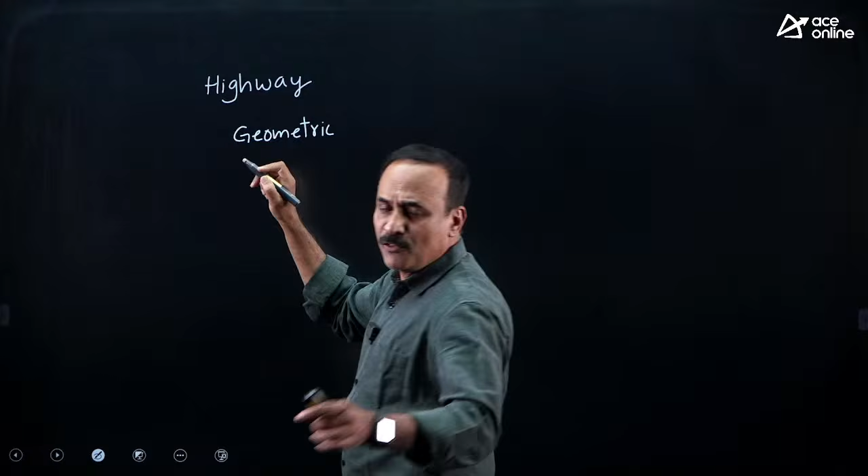You can rely upon this subject, provided you practice on NAT and MSQs properly. Especially in transportation, on highway, complete geometric design is completely formula oriented. If you have good fundamentals of mechanics and good memory, there is a scope of 3 to 4 marks.

Total is 10 marks, only geometric design gives 3 to 4 marks. You can use logic to solve the question sometimes.

Coming to pavement design, we have flexible pavement and rigid pavement design. In this, there is a scope of 1 to 3 marks. Mostly you need to remember a few specifications of IRC codes, IRC 37, IRC 58 also.

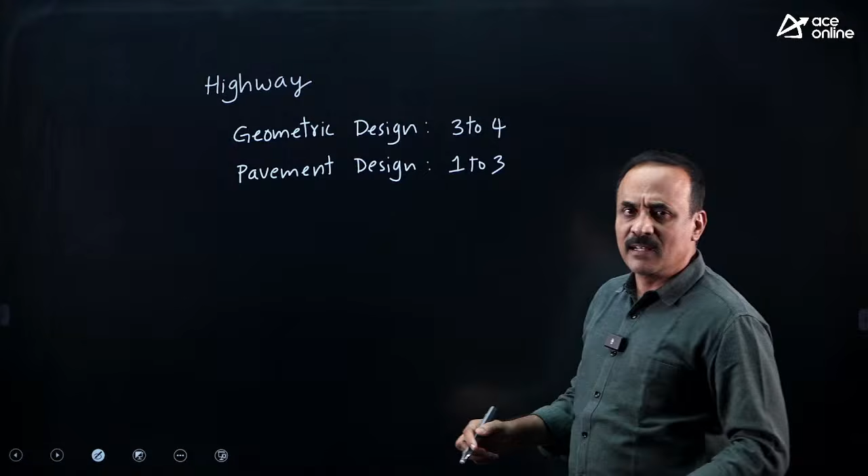Apart from that, you need to go with traffic engineering. If you are not very alert, it creates a traffic jam in the examination hall. This may be around 3 to 5 marks, having slightly higher weightage most of the times.

Coming to highway material testing, 1 or 2 marks. Especially in material testing, be careful about the Marshall mix design method, and concentrate on the aim, apparatus and specifications of each and every experiment of aggregate testing and bitumen testing.

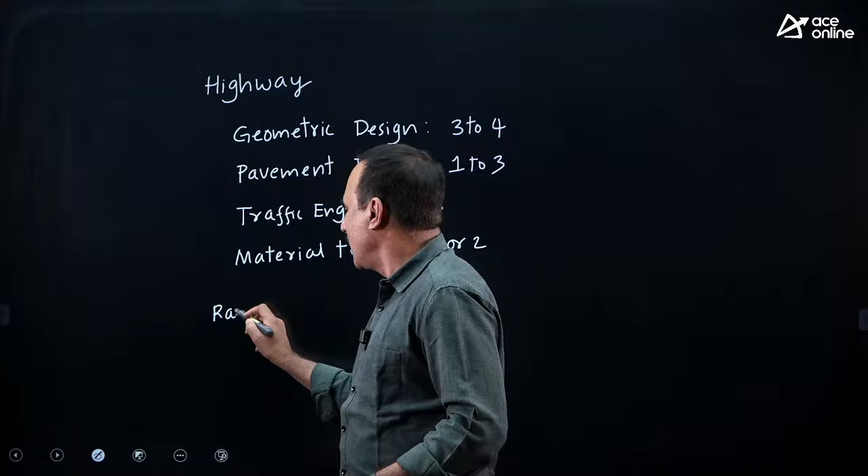Now coming to railway and airport, there is a chance of 2 marks. Getting a question from both railway and airport is rare, but you may get either a question in railway or a question in airport. There may be a chance in 2026 to get a question combining railway plus airport. We only have geometric design for railway and airport.

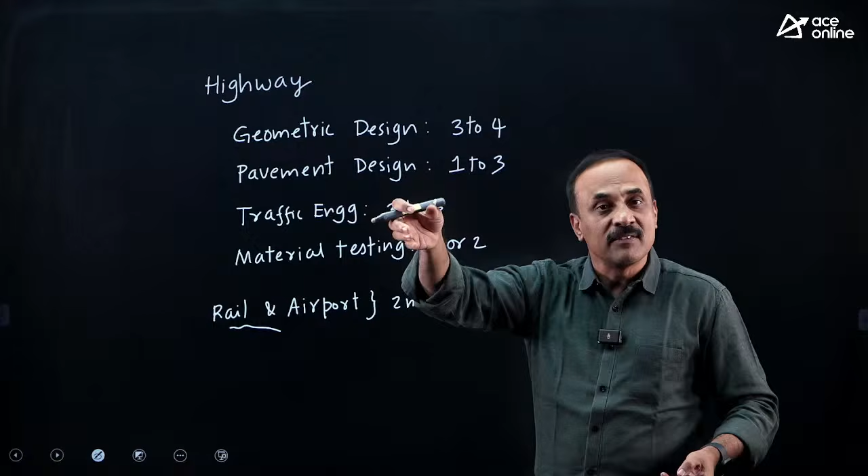Be concentrated on the requirement, especially from the GATE point of view. They'll ask you questions within the bound, meaning they won't go out of the syllabus. So stick to the syllabus, and my suggestion is to go through the previous year questions and similar questions. Questions will not repeat in the GATE exam, but the concept will repeat.

So similar questions will come in the GATE exam. Not only in this subject, in any subject you take, similar questions may repeat. That's why you have to go through the tapped areas where questions are getting repeated, and after you get full confidence, go to the very critical untapped areas. So first focus on questions based upon the previous year GATE papers. Keep this point in mind. And GATE is the Graduate Aptitude Test.

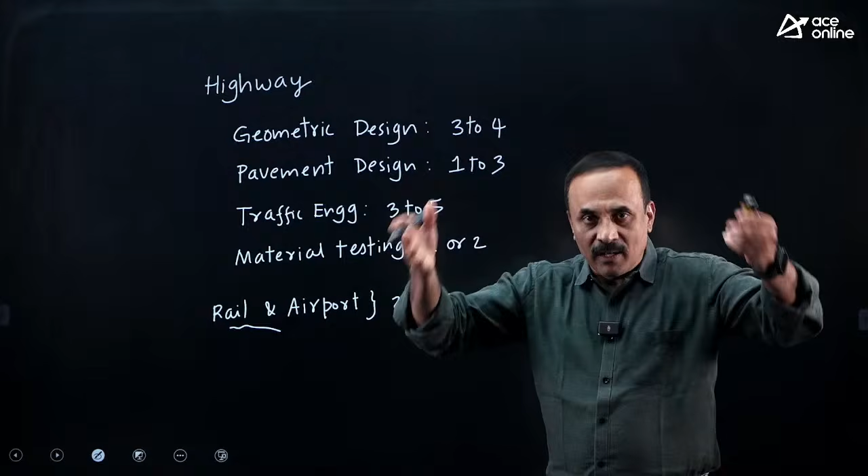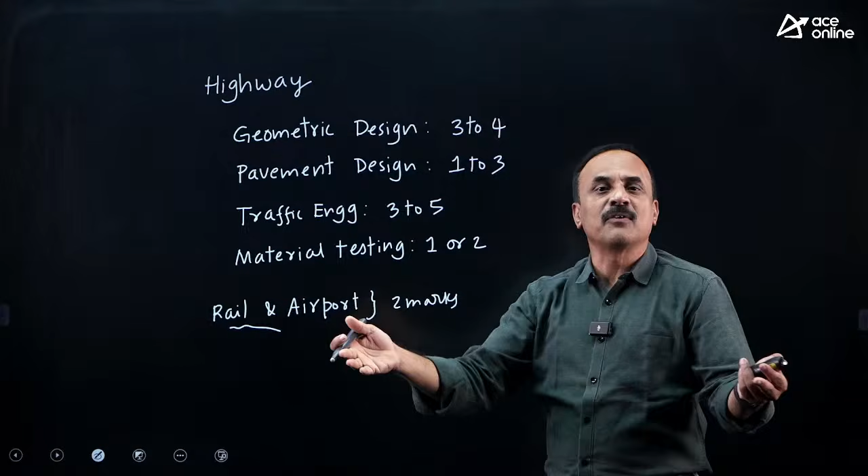Few questions may come on the aptitude, meaning with engineering aptitude thinking you can solve a few questions. If time permits, try to solve such slightly critical level questions with aptitude. Now we will start taking a few questions of transportation, mixing all the topics together randomly, so that even in the paper you get questions in a random manner. We will start with transportation questions, mainly numerical answer type and multiple select questions.

See this question. It is directly a multiple choice question, so one multiple choice will start and go ahead. Read the question: CBR test load corresponding to 2.5 and 5 mm penetrations are given as 80 and 100 kg. They are asking you the CBR of soil in percentage. This is a memory oriented question where you need to remember the standard loading. CBR at 2.5 mm settlement is load at 2.5 divided by standard load at 2.5, into 100. Load at 2.5 penetration is 80. Standard load at 2.5 mm you need to remember, it is 1370 kg, into 100.

So this may be 5.8%. And the same way, CBR of 5 you calculate: load at 5 mm settlement is 100 kg, divided by standard load 2055 kg, into 100. If you simplify with your online calculator, it is 4.8%. Use an online calculator, don't unnecessarily try to do it on your own and commit mistakes. If facility is given, use that. If you are writing exams like ESE prelims and other local exams, SSC JE exam, there is no other option, you need to simplify on your own. If facility is given, then use that facility, use online calculator in the simplification.

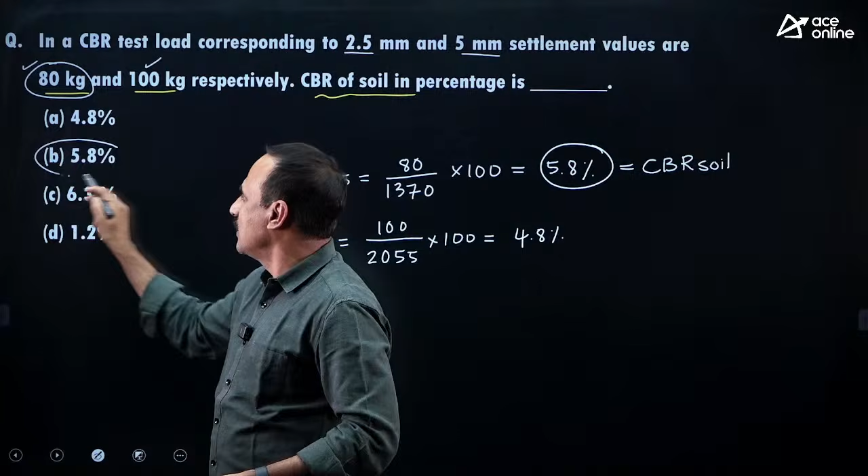So this is a multiple choice question. The problem with the multiple choice question is there is negative marking of 1/3 for a 1 mark question, and 2/3 for a 2 marks question. Now,

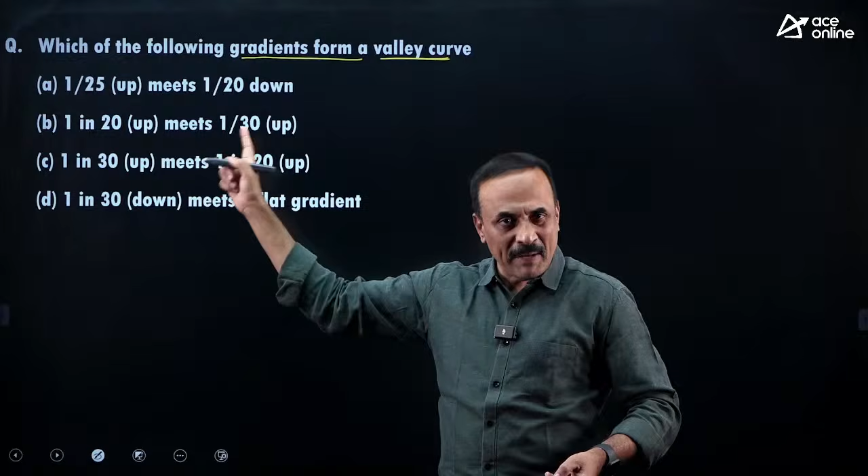See this question, it is from geometric design of vertical curves. Which of the following forms a valley curve? Valley is a sag curve. Remember, for a sag curve the deflection angle is negative, and for a summit curve the deflection angle is positive. Deflection angle is the algebraic difference of the gradients, nothing but first gradient along with its own sign, minus second gradient along with its own sign. Generally upward we take as positive, downward we take as negative. Give me which of the following are the valley curves. It is a multiple select question having more than one correct answer. Let us see how many of you are giving me the right option.

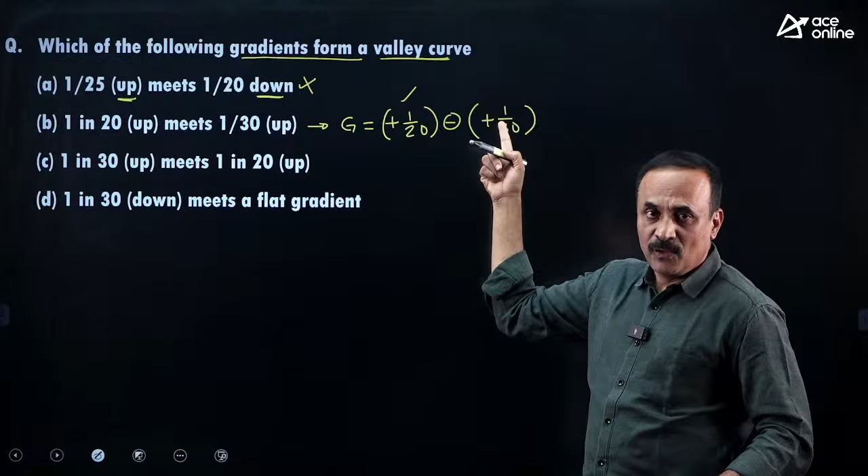Coming to the next one, 1 in 20 and 1 in 20 upwards, and 1 in 30 also upwards. So the deflection angle here is plus 1 by 20 minus of plus 1 by 30. 1 by 20 is higher, since you're dividing by 20, its value is higher compared to the value divided by 30. Higher value minus less value will be a positive value. Positive value means it is a summit curve, it is not a valley curve. No need of complete calculations, you can just check it up like this also.

Now, Murali, Nova, please check up. B is not in your list. B should not be in your list.

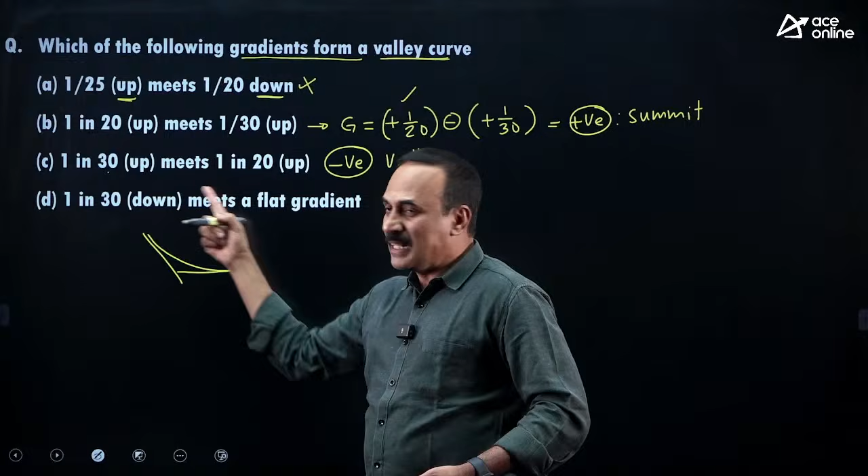So the answers are C and D, it is not A and B. D is also a valley curve where the deflection angle comes out to be negative, as Hari Krishna noted. Okay, is it okay?

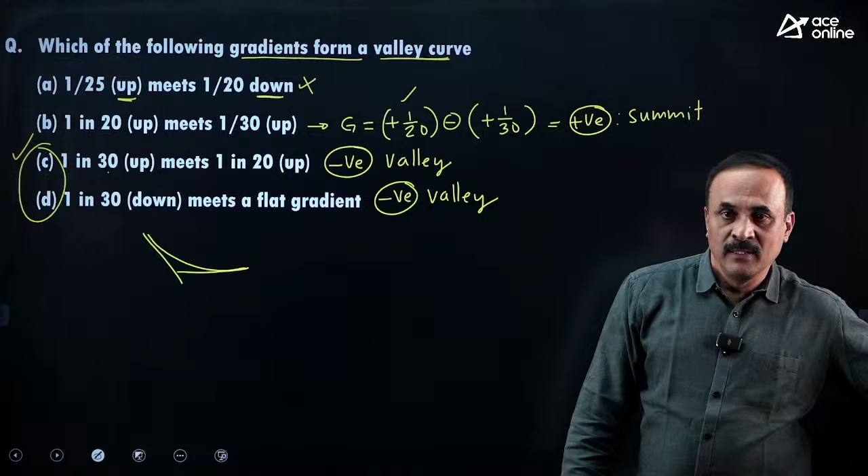Yes, we will move to the next. Look at this question. This is related to Marshall specimen of bituminous concrete mix, tested in a lab, giving the following results.

Maximum specific gravity of the mix is nothing but theoretical specific gravity of the mix. Maximum we get if there is no air, so this is theoretical specific gravity without air. Bulk specific gravity is a measured specific gravity, including air.

Percentage weight of bitumen is given as 5.5% by weight. Specific gravity of bitumen is also given as 1.02. Assuming no absorption of bitumen, the voids in mineral aggregate and VFB values are being asked.

It is also a multiple select question, there may be more than one correct answer. VMA is 46.9 here, and VMA is 19.45 here, so any one of options A and C may be correct. Similarly for VFB, any one of options B and D should be correct. For that we need to calculate.

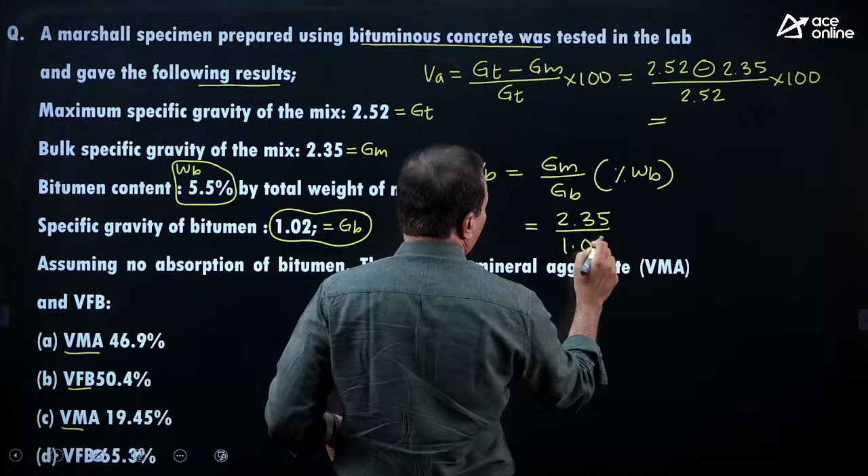Next, volume of bitumen is GM by G of bitumen into percentage weight of bitumen. GM is given as 2.35, specific gravity of bitumen is given as 1.02, percentage weight of bitumen is 5.5%. Calculate this, and voids in mineral aggregate from percentage air content and percentage bitumen content.

Calculate, and voids filled with bitumen is volume of bitumen divided by total voids in mineral aggregate into 100. Give me the answer. Let us see which options are correct.

There is a scope of committing mistakes in the calculations, be careful. Air content is 6.75%. Next, bitumen content is 12.7%.

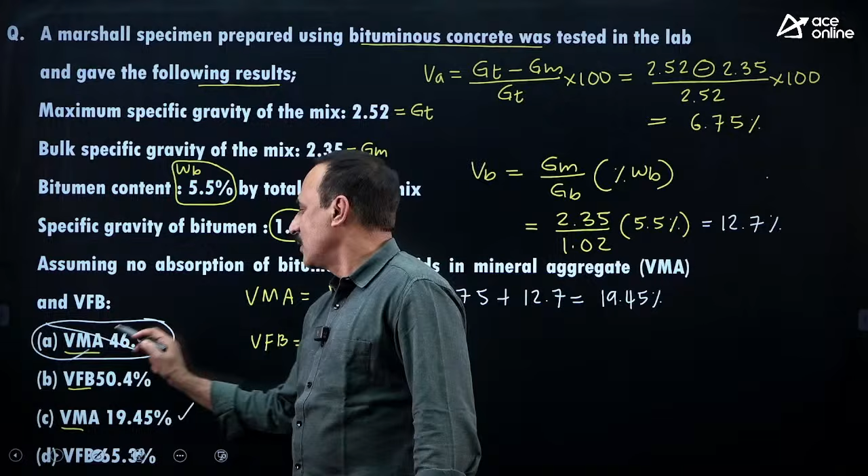A is gone. Voids filled with bitumen: bitumen content is 12.7, total voids are 19.45, into 100. How much percentage of bitumen is there in the voids? 65.3. So here 50.4 is gone, the answer is 65.3.

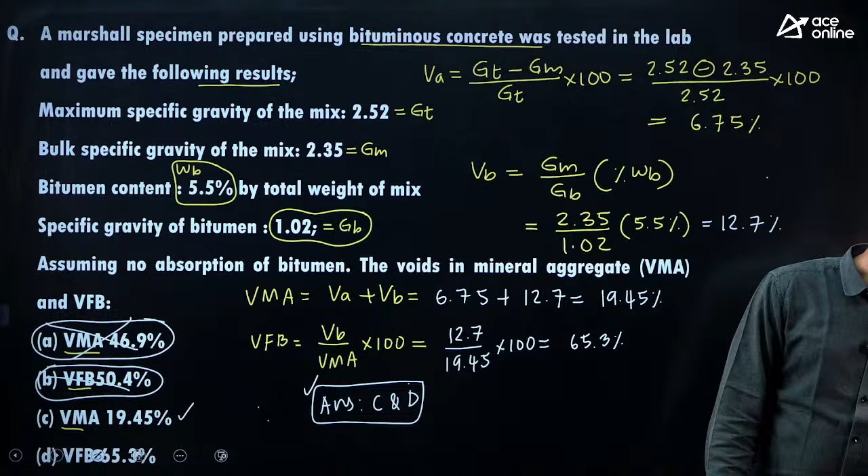Answers are C and D. Be careful about such multiple select questions where more than one answer is there. Rocky, Satish, Murali, Hari Krishna, and Nova all gave correct answers. Perfect, we'll move to the next question.

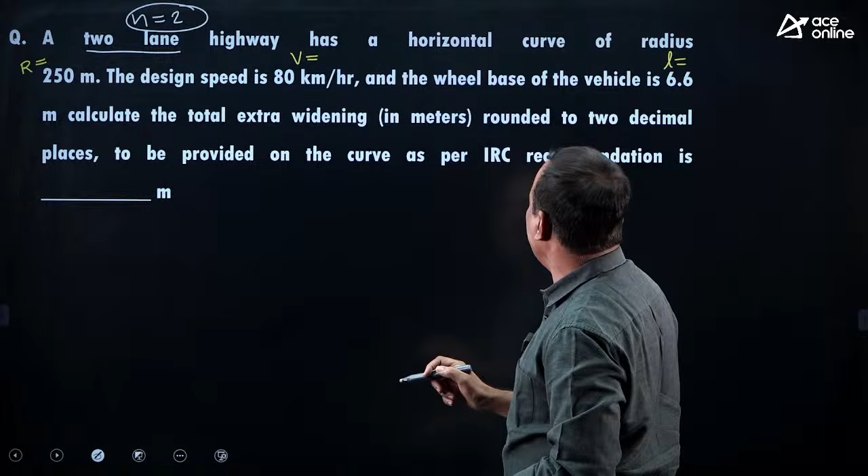A two-lane highway has a horizontal curve of radius 250 meters, n equals 2. Design speed is 80 kmph, wheelbase of the vehicle is 6.6 meters. Calculate the total extra widening in meters, rounded to 2 decimal places, provided on the curve as per IRC recommendation.

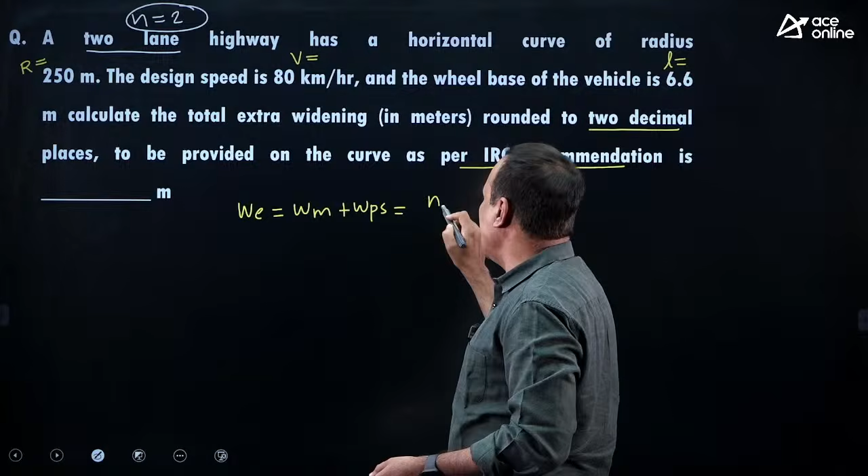This is a numerical answer question, be careful. Extra widening comprises mechanical plus psychological widening. Mechanical widening is NL square by 2R, and psychological widening is V by 9.5 root R, for a two-lane road.

For each lane, divide by 2; if you have more lanes, multiply by n. For a 3-lane road it's 3 by 2 of this, for 2-lane road it's V by 9.5 root R, for 4-lane road it's 4 by 2 into this. For a single lane road, psychological widening is not required per IRC, you only need mechanical widening. This point must be added now in solving the problems.

N by 2 is to be added now, we will solve by substitution of values. N is 2, length of rigid wheelbase 6.6 whole square by 2 into radius 250. Be careful here, this n by 2 is required in the present situation. In olden days people were using psychological widening as V by 9.5 root R regardless of number of lanes, but now n by 2 into this is a must because it's for two-lane roads.

For multi-lane roads, this is to be distributed accordingly, as given in IRC. So 2 by 2, design speed is given as 80 kmph, 9.5 root over 250 meters. Simplify this and give me the answer. I will check up the answer.

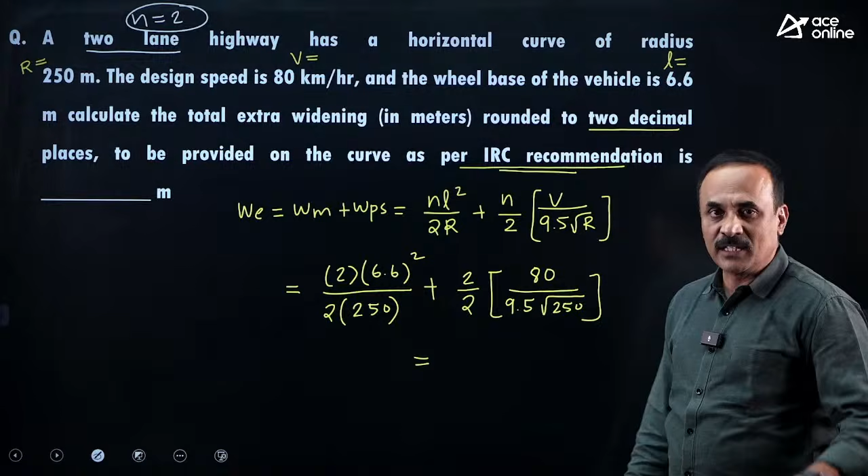In case n by 2 is not mentioned, you get wrong answer. If you are not using this, luckily for 2-lane road it may be okay, but if it is 4-lane or 6-lane road, you may miss the answer. If you look at old previous year GATE questions, some 10 years back, even for 4-lane roads, only V by 9.5 root R was used, and there was no such discrepancy then. But in the present IRC, modified IRC, they have clearly mentioned that V by 9.5 root R is for 2-lane roads. For any other multi-lane roads, this is to be distributed according to the number of lanes, that means n by 2 into V by 9.5 root R. For single lane roads, there is no need of psychological widening.

So what is the answer, Murali? If you take this rounded to 2 decimal places, it is 0.71 meter.

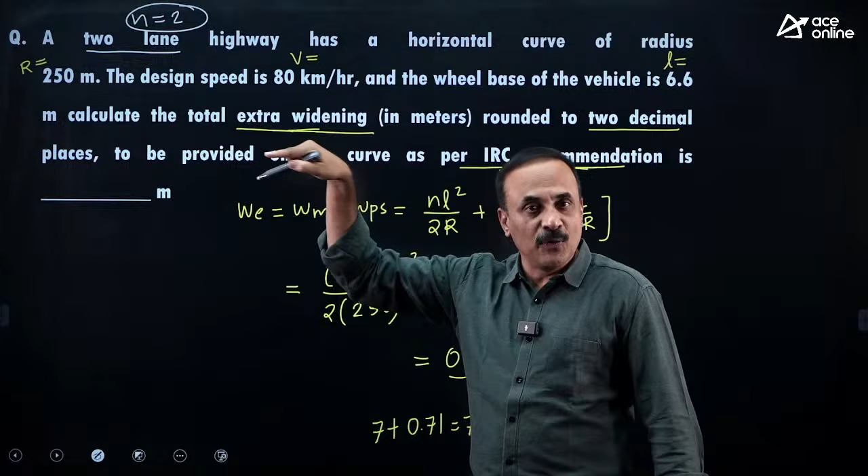Be careful, they are asking you extra widening only. Sometimes they will ask you what is the total width of the road. If they are asking total width of the road, 2-lane road width is 7 meter, for each lane 3.5 meter, so 2 lanes is 7 meter plus 0.71, so it may be 7.71 meter total width of the road on curve. But presently they are asking extra widening. That is why I keep telling you, read the question carefully. If you are not reading the question carefully, you may miss the answer. Sometimes they will ask extra widening, sometimes total width of the road on curve along with extra widening.

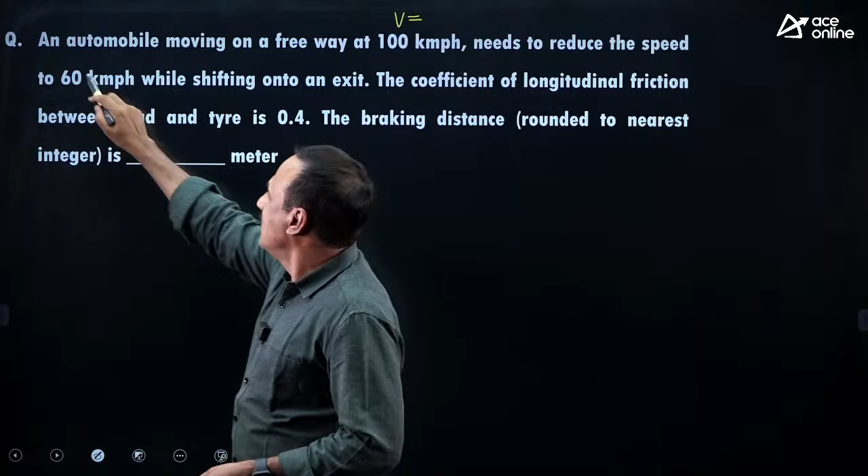Next question. An automobile moving on a freeway at 100 kmph needs to reduce speed to 60 kmph while shifting into an exit. The coefficient of longitudinal friction between the road and tire is 0.4. Braking distance they are asking you. Braking distance is given by initial speed square minus final speed square, divided by 254 into longitudinal friction. Substitute and give me the answer. It is a straightaway formula-oriented numerical answer question.

Murali, that previous question answer 0.706, if you round it to 2 decimal places, becomes 0.71 meter. Rounding off as per the requirement is compulsory in the GATE exam.

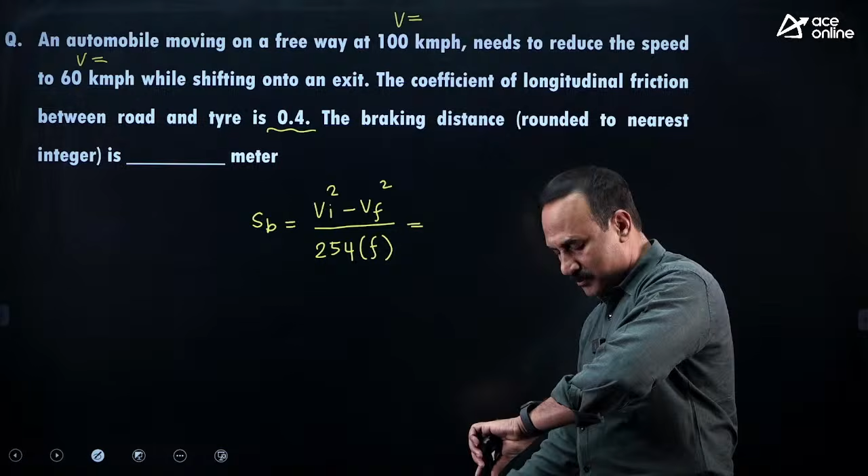So here, 100 square minus 60 square by 254 into 0.4, rounded to the nearest integer. So it is 62.9 meter you are getting. If you round it to an integer, you need to round it to 63 meter. Be careful, it is to be rounded to 63 meter. Is it 63 or 67? Please check up. Yes, 63 meter, 62.99 rounds to 63. Murali, you are correct.

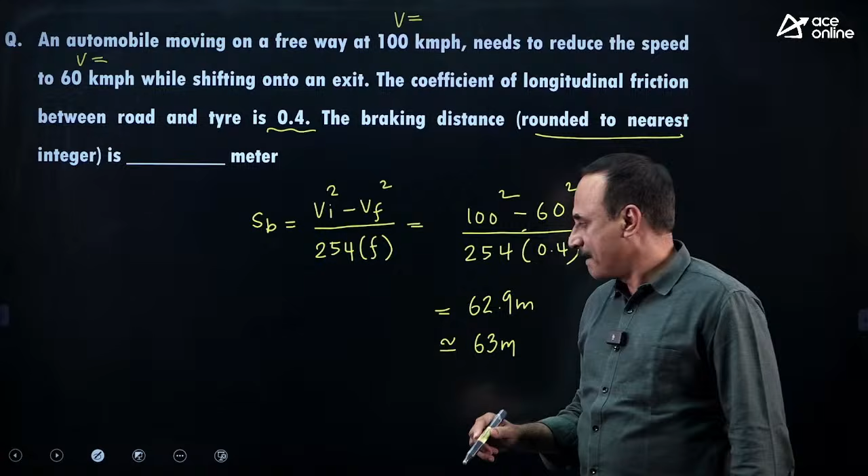But Sharath is giving 67. Be careful, if you are not concentratedly calculating the things, you may miss the answer. We will move to the next question please.

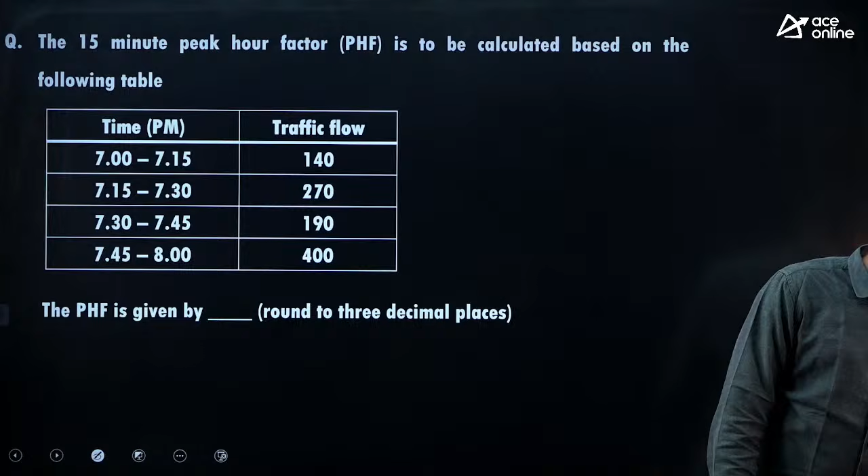Next question. The 15-minute peak hour factor is to be calculated based on the following table. The peak hour is 7 to 8, taken in 15-minute time slots. Among the 4 time slots, the highest is 400. The total is 140, 270, 190, 400.

So peak hour factor is equal to total traffic flow during 1 hour divided by 4 into the higher of the 4, 15-minute slot values. Give me the answer please, try to give me the right option.

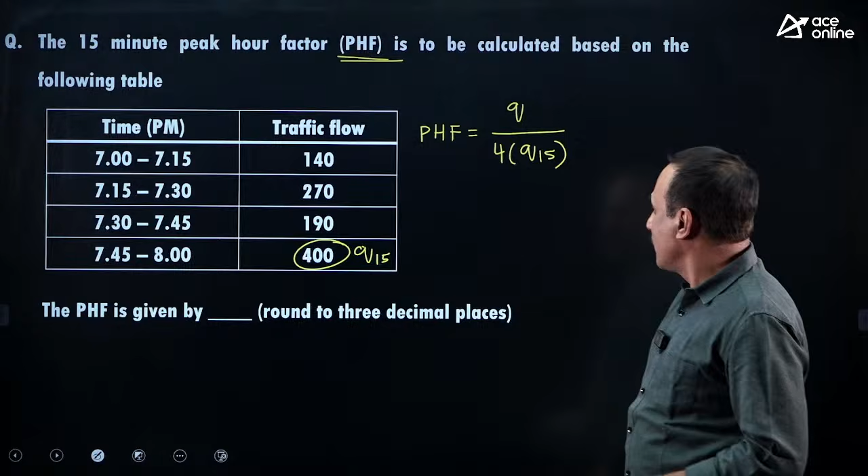The sum is 140 plus 270 plus 190 plus 400. Highest of the 4 slots is 400 again. So this ratio is 0.625. Round to 3 decimal places they are asking, so 0.625 is the right option.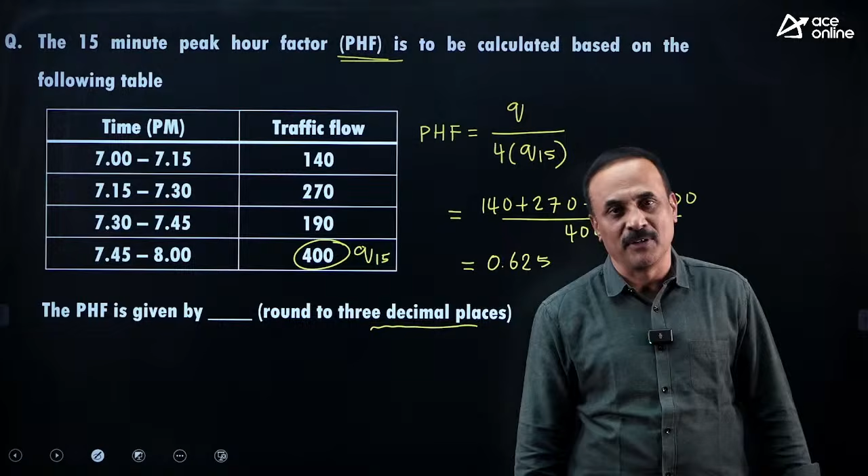Let us see how many have given the answer correctly. Sharath, you are committing a lot of mistakes. He has given 0.165, that is a mistake. Even though you know the concept, the procedure, and have by-hearted the formula, committing a mistake in the calculation is a suicidal attempt. Be careful Sharath, you have to be very careful. Speed is not important, safe speed is important. Other people have correctly given 0.625. Satish given correctly, Nova correct.

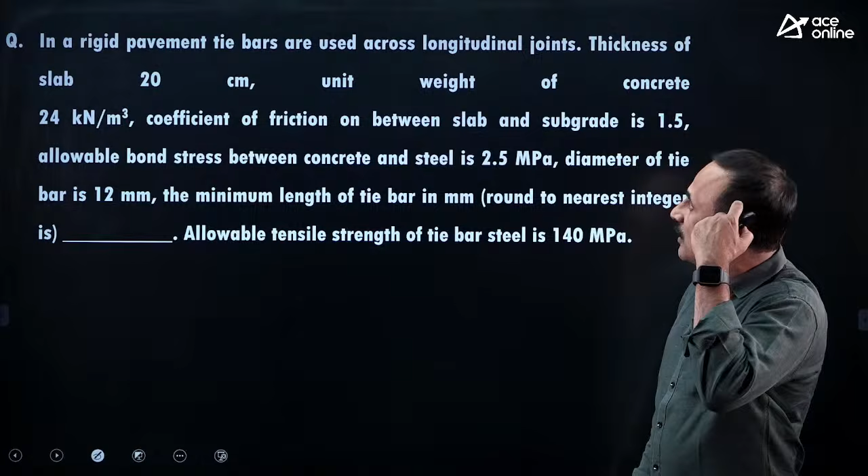3 decimal places, we will move to the next. In a rigid pavement, tie bars are used across longitudinal joint. Thickness of slab is 20 centimeter. Unit weight of concrete, gamma of concrete, is 24 kilonewton per meter cube. Coefficient of friction between the slab and soil is 1.5.

Allowable bond stress, design bond stress, directly you can take it: Tau BD is 2.5 megapascal. Diameter of tie bar used, phi, is 12 mm. The minimum length of tie bar, rounded to the nearest integer, they are asking - numerical answer question. Allowable tensile strength of the steel, sigma st, is given as 140.

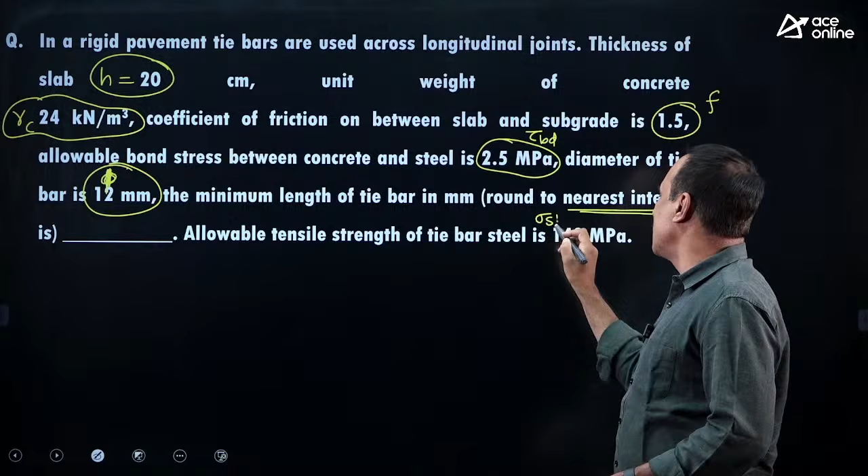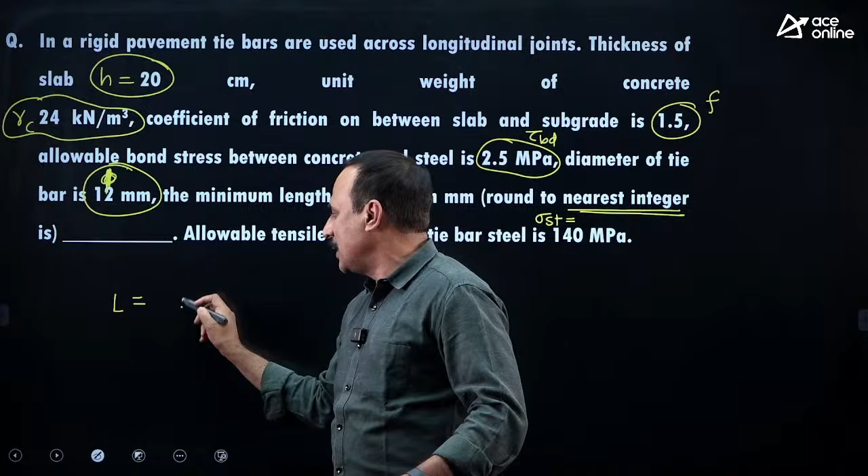So length of tie bar is taken such that the tie bar should be embedded on both sides of the pavement, left side as well as right side. On the left part it should have a minimum embedment of development length, on the right part also a minimum embedment of development length is required. So total length of tie bar is 2 into development length.

The development length is given by phi into sigma st by 4 tau BD. Tau BD is design bond strength, phi is diameter of steel bar, taken as 12 mm. Take everything in mm and Newton units only. Sigma st is 140 megapascal, nothing but Newton per mm square. Tau BD is also in megapascal, 2.5 Newton per mm square.

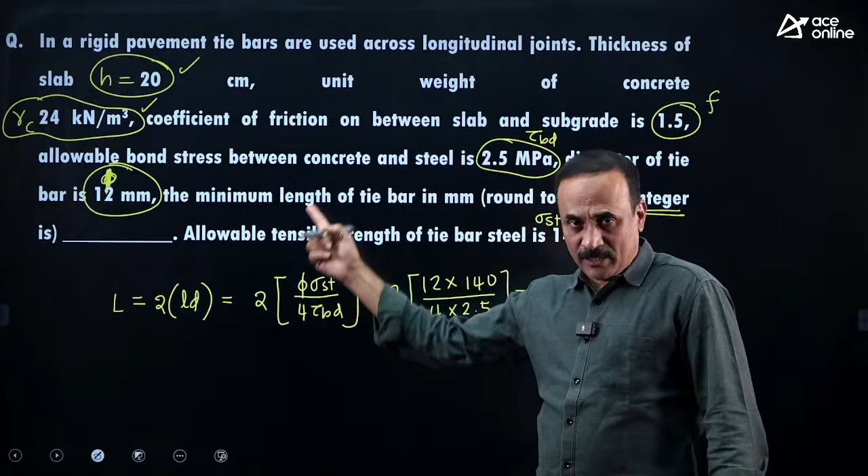In this question, thickness of the pavement is extra data, not useful. Density of the pavement is also extra data, not useful. Sometimes they give extra data to confuse people, so be careful about such extra data. Without feeling tension, without facing pressure, you need to eliminate that extra data, simplify, and give me the answer.

Let us see what answer is given here. Murali has given 336 mm. Let us see one more answer. Murali goes with 336 mm. They are asking you to round it to the nearest integer. Okay perfect, 360 mm... 336 mm is the right option.

Shall we move to the next question? Only Murali has given the correct option. Nobody else has given it. Okay yes, Satish also given correct. Okay, we will go to the next question.

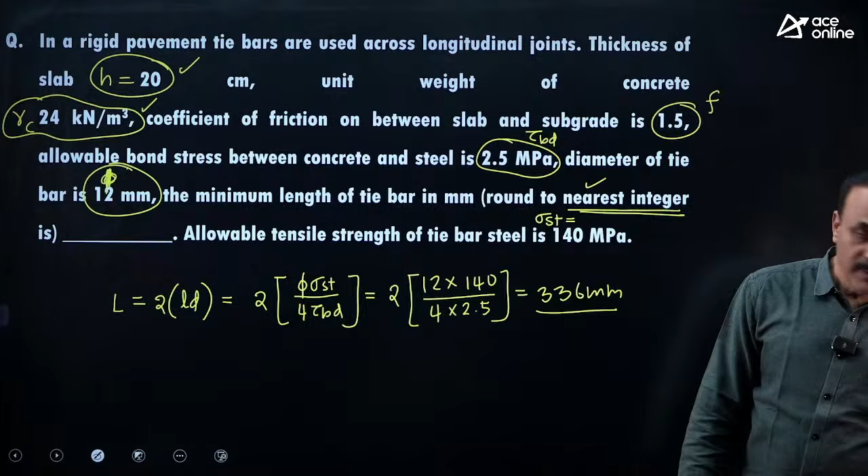Which of the following statements are true with respect to geometric design of highways? It is also a multiple select question. Based upon geometric design of - not railways - highways they are asking. Read the question properly, first read on what basis they are creating the question: they are creating it on geometric design of highway.

The coefficient of longitudinal friction is... very sorry, coefficient of longitudinal friction is 0.35 to 0.4. Lateral friction is 0.15. So statement A is false. But in a multiple select question, you need to read all the options and identify which is correct and which is false. Next, option B: maximum super elevation on hilly road as per IRC is 10%, right?

Plain terrain, rolling terrain: snowbound hilly terrain it is 7%, and normal hilly terrain it is 10%, correct. The rate of change of centrifugal acceleration on a horizontal transition curve is 0.5 meter per second cube for a design speed of 100 kmph - that you need to check up. So capital C is 80 by 75 plus V.

V is 100 kmph, so 80 by 75 plus 100. What should be the value? You get it as 0.46, but capital C should be between 0.5 to 0.8 meter per second cube. So as the value is less than 0.5, you need to use C is equal to 0.5 meter per second cube. So the answer is option C is true.

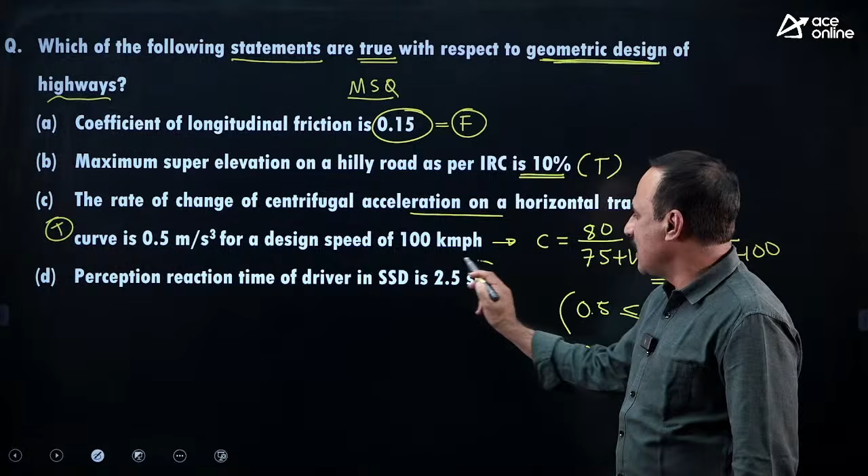Perception reaction time of driver in SSD is 2.5 seconds, this is also true. Please read the question carefully. In SSD, reaction time is 2.5. In OSD, if they are asking you, it is 2 seconds. So the right options are, except A, all are right: B, C, D.

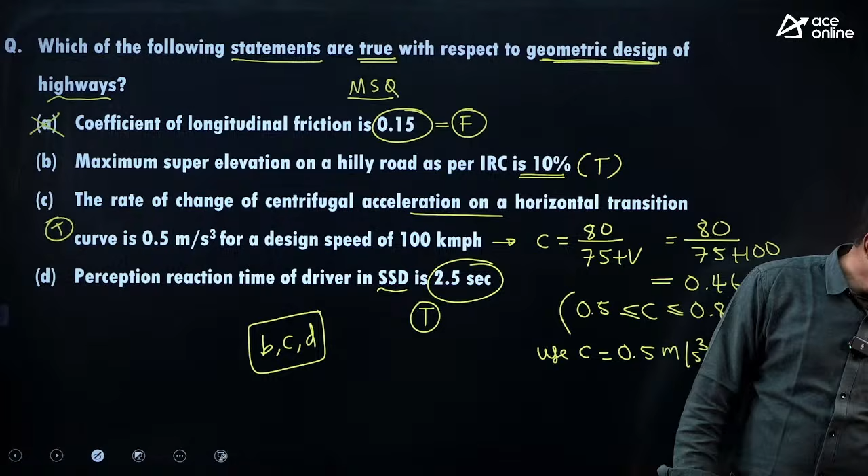Any doubts? Already most of the people have given this as the answer. Hari Krishna gave correct, Murali also gave correct. All specifications you need to remember, Murali.

Specifications are important for GATE exam. I told you so many times, specifications plus formulae are very important. And in case of empirical formulae like this, the unit of speed is also important for us. The speed is capital V in kmph. C is rate of centrifugal acceleration in meter per second cube. Be careful, units, specifications, formula you need to write.

Come to the next question. The speed and density curve is given below. What may be the flow and density relation? This is given to us. Which option is correct for that?

Any option please? Actually, Q is equal to kV. Up to here, speed is constant. Speed is constant, only density is increasing. Density linearly increasing, speed constant. Q should also linearly increase. So from here to here,

Q should also linearly increase. With that, only one option works. Q should also... V constant, K increasing. With that one option, you can pick up the answer as option A directly. Because it is starting with some V, say V is 20, everywhere it is 20 only. V is not changing. With K it is changing.

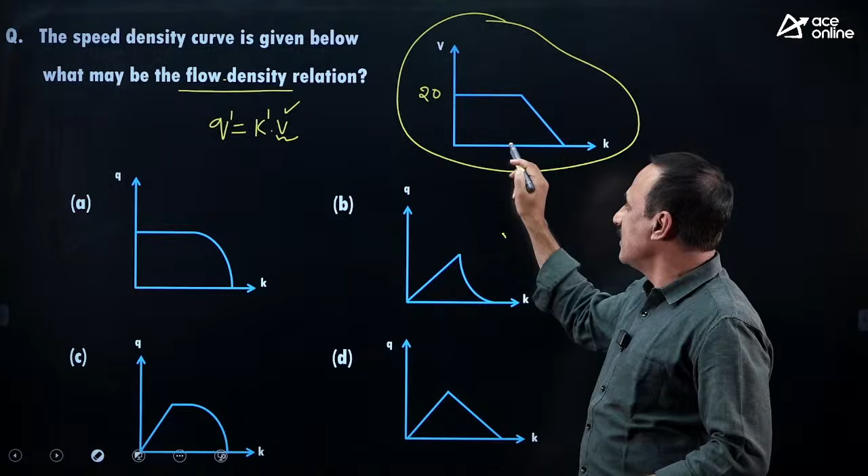Say for example, K is 0 - I think this is wrong, very sorry, be careful. So if the k values are increasing here, q should also increase. If k is 0, q should also be 0. If k is increasing, q is increasing, sorry, k is increasing, q should also increase in the same manner. So the answer should be linear in the first zone, it should be linear.

This is the first option to be eliminated. If k is increasing: k 0, q also 0; k 0, q also 0; k is 1, q also 1; k 2, q also 2, like that it increases from 0. K 30, q 30, 30 into v, v is a constant.

Now come to here, there is a sudden drop of speed, a decrease of speed. So if you observe, speed suddenly decreases, meaning q should also decrease in the same manner. But if you observe here, there is a drastic reduction of q, but here the reduction is not that drastic, it is gradual. So this is ruled out, and here it is linearly decreasing. Linearly decreasing is not possible because here speed is changing, k also changing. The main point is, as there is gradual reduction of values, this is the right option. So the answer is option C.

Logically, you need to pick up the answers. Logically, you need to pick up the answers. Okay, any doubts here, please?

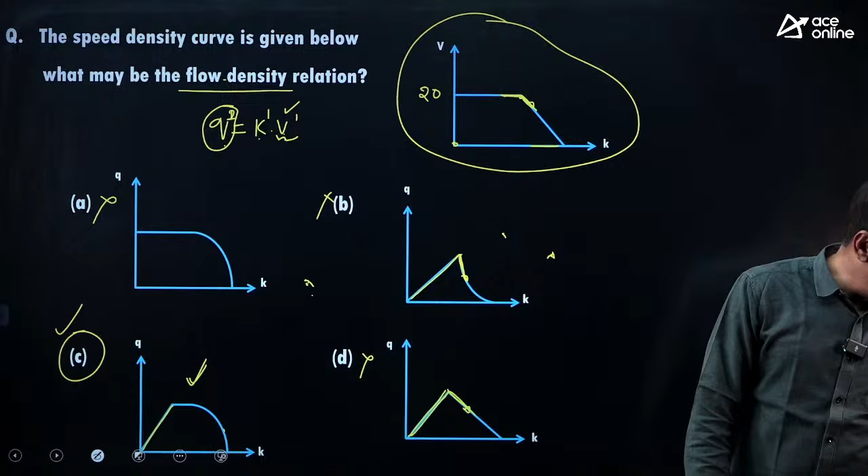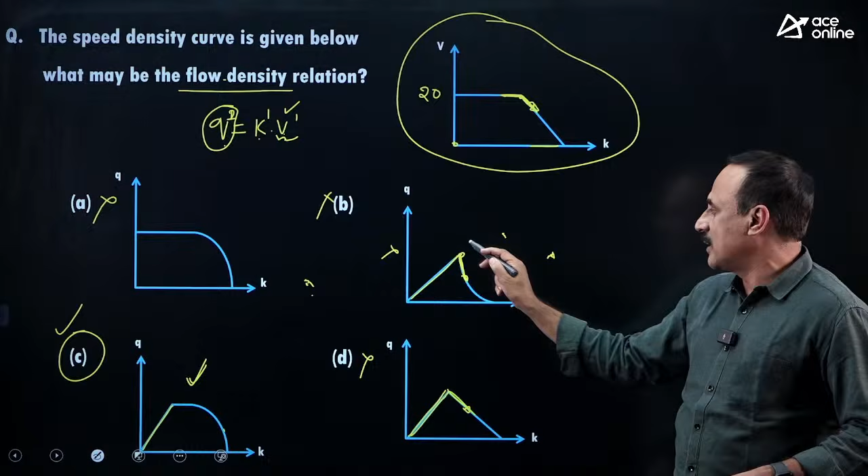You have a doubt between B and C. Satish, here there is a sudden decrease, but here such a sudden decrease is not there in speed, it's gradually decreasing, density is increasing, speed is gradually decreasing. So this is the right option, this is not correct because of the sudden change, sudden decrease. Okay Satish, we will move to the next question.

Try this question, based upon overtaking sight distance. Car A follows car B at a speed of 20 meter per second. Car A following car B means the slow vehicle speed is 20 meter per second. The driver of car A accelerates at 1 meter per second square to overtake car B, the acceleration given is 1 meter per second square. The distance between the two cars before and after overtaking is 20 meter. S1 is equal to S2 is equal to S is equal to 20 meter.

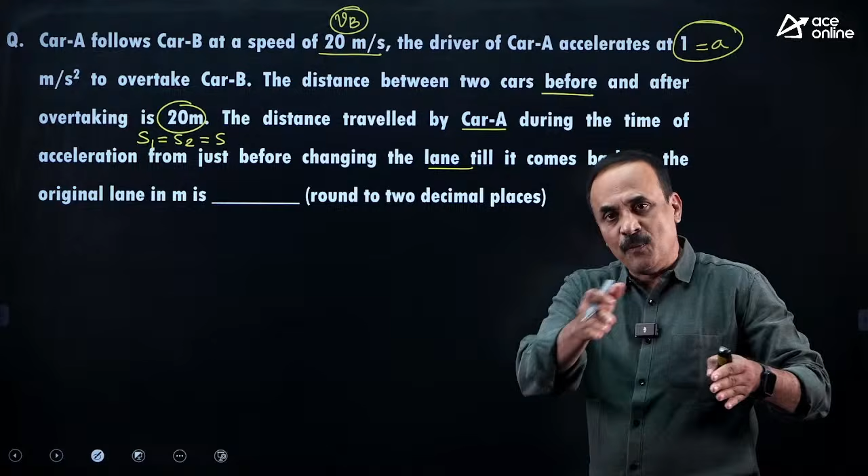4 into 20 is 80. 80 root may be 8.9 seconds. Use calculator, don't unnecessarily simplify on your own.

Use calculator, 80 root is 8.9. Now, what about our D2? D2 will be 218.89, rounded to 2 decimal places. S1 is 20, VB is given as 20, capital T you are taking this as 8.9, and S2 is also 20. Substitute 218.89. Is it correct? Yes, Murali given correctly.

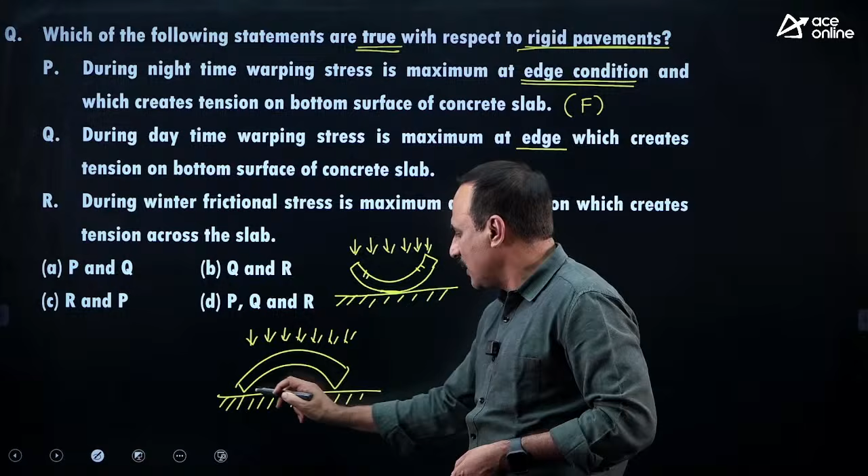Now, coming to Q, during daytime, warping stress is maximum at edge, which creates tension on the bottom surface of the concrete. During daytime, pavement warps like this. It is under hogging condition. It is free to warp if there is no self weight, but if the self weight is also applied, then what happens is the edges are in touch, the corners are in touch with the soil, no stress at corner,

but edge is lifted up. Because of lifted edge and self weight pressing back to the position, there will be tension on the bottom of the edge region. So, during daytime, there will be tension on the bottom of the edge region. During night time, there will be tension on the top of the corner region. These points you need to remember in a logical manner.

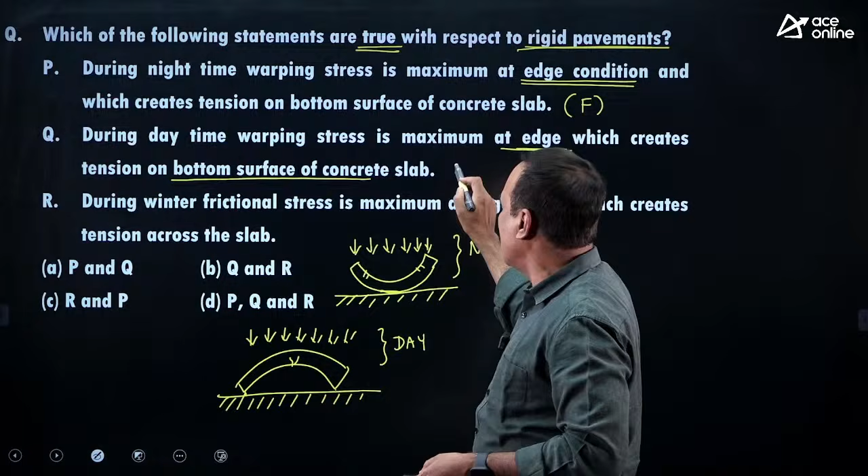What about statement 2, statement Q? During daytime, warping stress is maximum at edge, which creates tension on bottom surface of the concrete. This is true. Daytime, bottom of the edge you have the crack. Night time, top of the corner you have tension.

During winter, frictional stress is maximum at edge, which creates tension across the slab. During winter season, pavement wants to contract, soil below the pavement pulls it back to the position. Because of pulling back to the position, we have tension, and that tension will come at the edge region. It creates a tension at the edge region during winter. Summer, it is under compression. So, R is true statement, Q also true statement. Answer is option B, you can choose.

Okay. Anybody given this answer correctly? Very good. Satish correct. Murali correct.

Try this next question. Is a very commonly asked question from linear speed density relation by Greenshield. Only if this point is given, use the capacity of the road as the maximum density by 2 and maximum speed by 2 is equal to capacity.

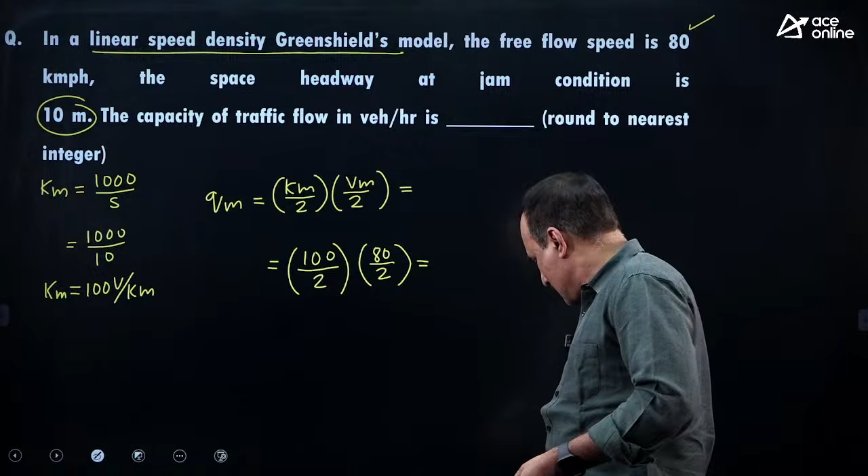Now, substitute K max is 100 by 2, maximum speed is given as 80. So, 80 by 2 into 100 by 2. What is the right option? 2000, 50 into 40, 2000 vehicle per hour.

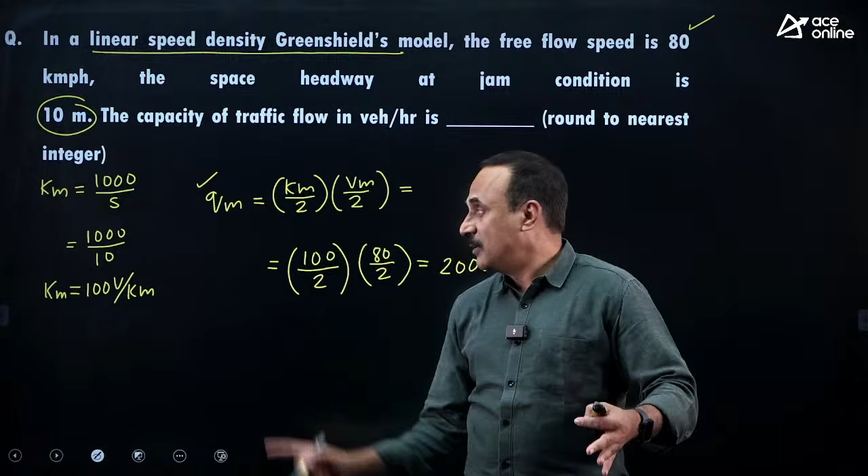Greenshield method is very important for GATE exam. You can calculate the capacity of road or capacity of a lane by using this formula if linear speed density is mentioned in the question or Greenshield is mentioned in the question. Otherwise, you can't use this formula, please. Very important for GATE. Try this question.

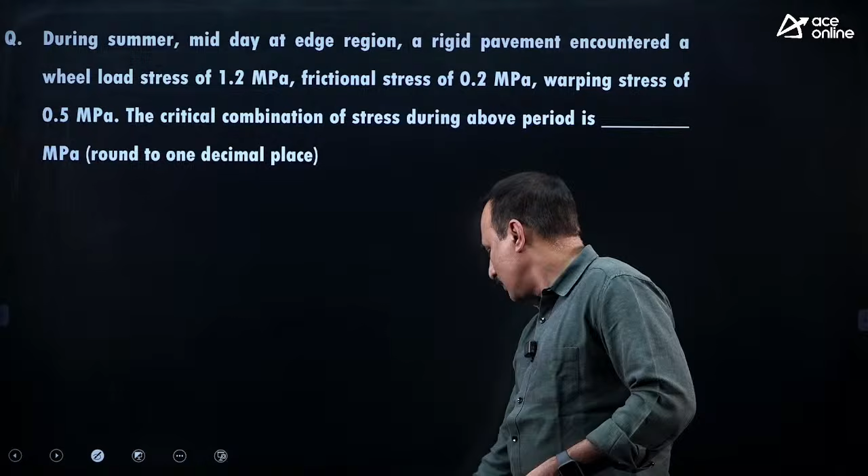During summer midday at edge region, the rigid pavement encounters a wheel load stress of 1.2 megapascal, frictional stress 0.2 megapascal, warping stress 0.5 megapascal. The critical combination of stress in this period, the summer midday period, needs to be calculated.

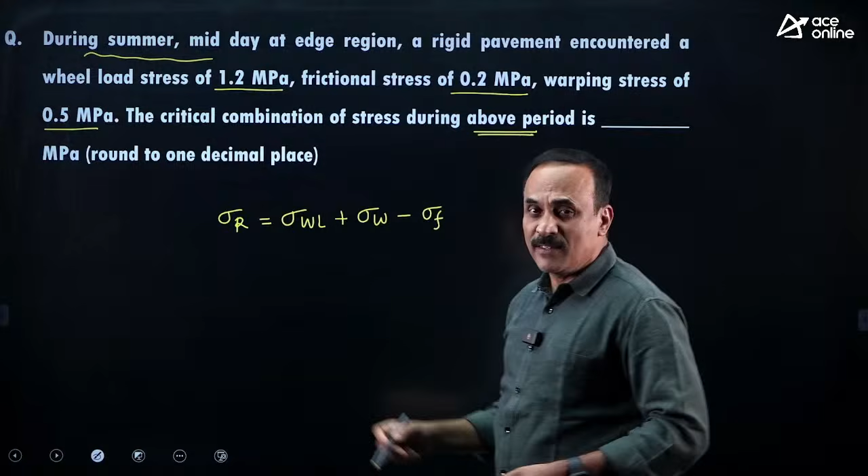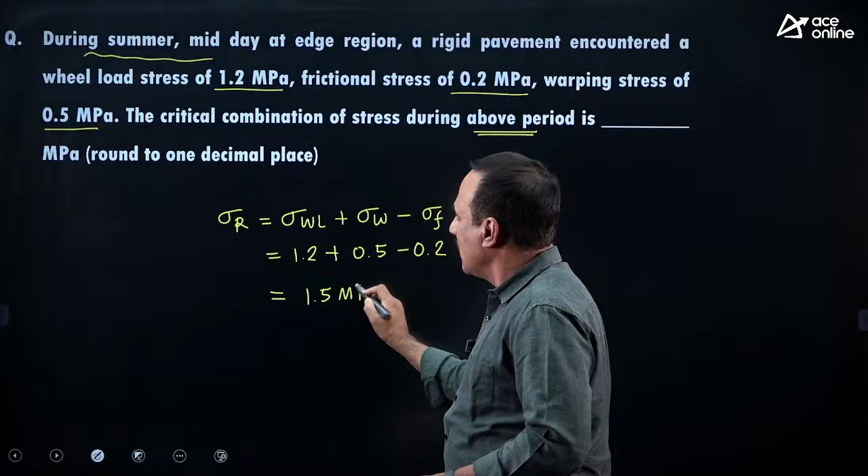Summer midday period resultant stress equals stress due to wheel load plus stress due to warping. Friction is negative, meaning compression; positive means tension. So it's very simple: wheel load stress is 1.2, warping stress is 0.5, frictional stress is 0.2. What is the answer? 0.3 plus 1.2 is 1.5 megapascal, rounded to 1 decimal place, 1.5 megapascal, you need to put that there.

Be careful with such questions. All the critical combinations of stresses you need to remember logically. Wheel load stress and warping stress must always be added together in all combinations. In winter, friction is taken as plus, a tensile stress. In summer, you need to take minus. Summer: warping stress is taken, frictional stress is taken negative, meaning compression. In winter, frictional stress is taken as positive, meaning tension. Tension causes cracks in the pavement.

Most of the answers are correct. Murali given correctly, Manoj given correctly, Hari Krishna given correctly. Perfect. Okay Murali, try this question.

This is from airport. Length corrections are very important for airport.

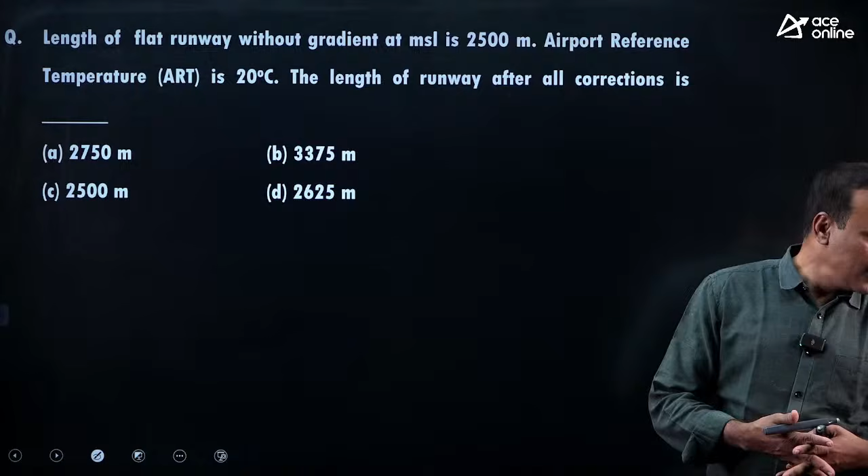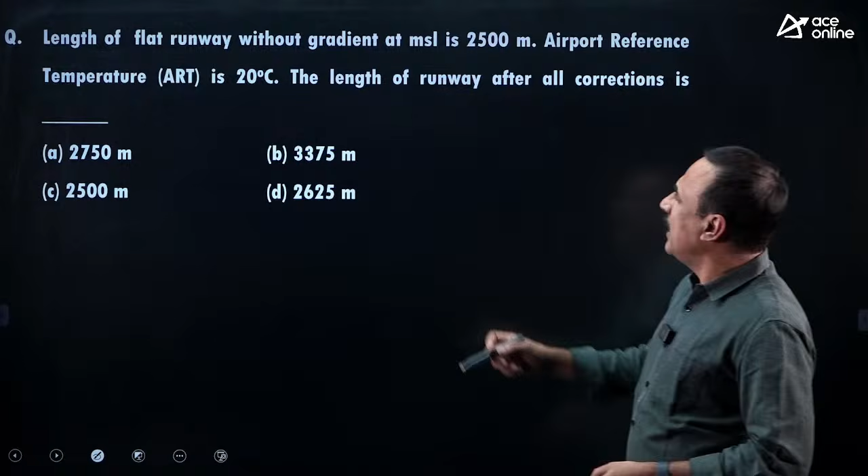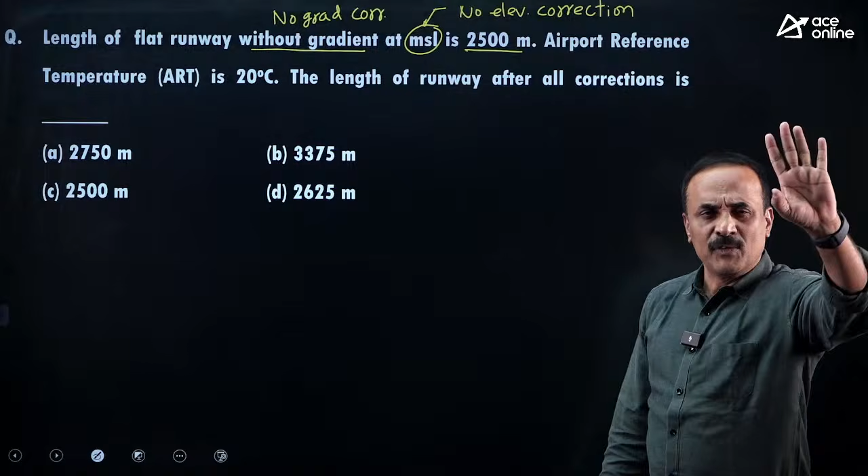The length of flat runway without gradient is 2500. No gradient correction is required, and the runway is at mean sea level, meaning no elevation correction is required. You need only temperature correction. Actually you need to do sequential corrections: first elevation, then temperature, then gradient. But here elevation correction is 0, gradient correction is also 0 because it is a flat gradient. Only temperature correction is to be calculated. So the length of runway after all corrections is nothing but the length after temperature correction only. Consider only temperature correction.

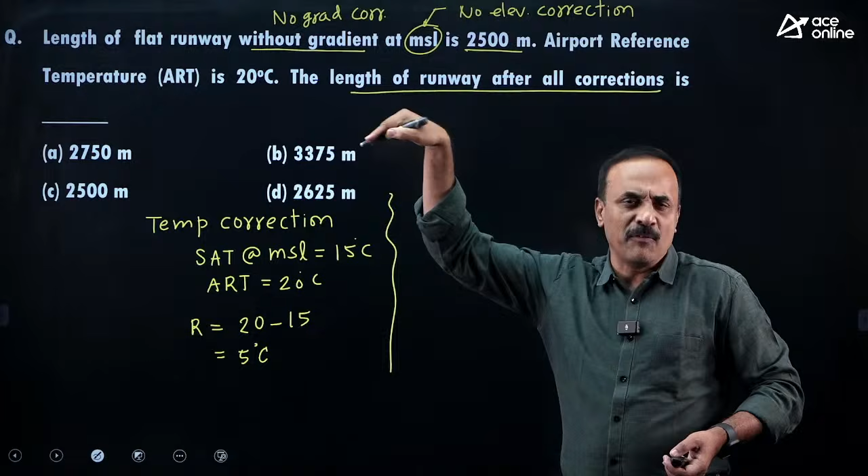Standard airport temperature at mean sea level, since you are constructing the runway at mean sea level, is 15 degrees centigrade. Airport reference temperature is 20 degrees centigrade. The rise in temperature is ART minus SAT, 20 minus 15, which is 5 degrees centigrade. ICAO says for every 1 degree rise in temperature, increase length by 1%. So for 5 degrees rise in temperature, increase length by 5%.

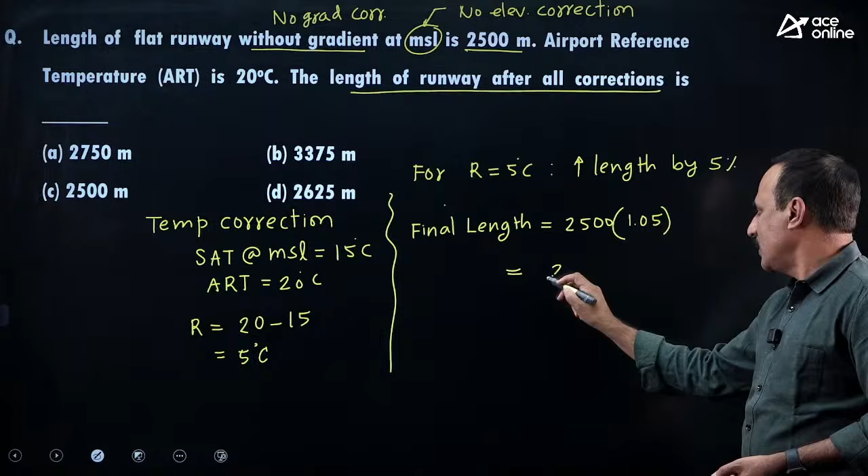So final length equals initial length plus 5% increase. Initial length is 2500, 5% increase means multiply by 1.05, giving 2625. Rounded to integer, 2625. Murali, perfect, that's what required. Be careful: no elevation correction, no gradient correction, temperature correction is the final correction we need to use.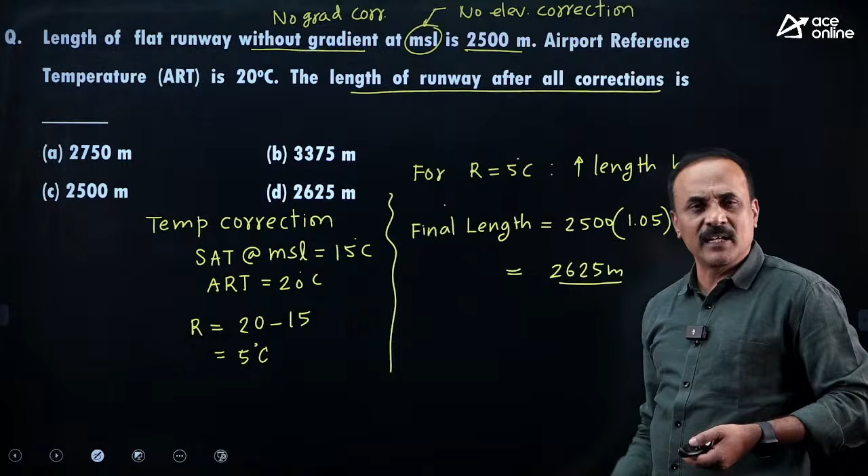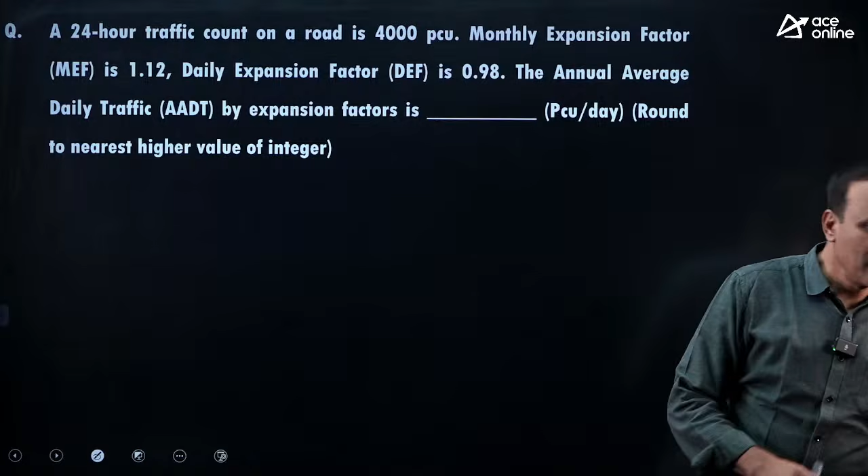Very good Murali, Murali given the answer. So AADT is given by multiplying all expansion factors.

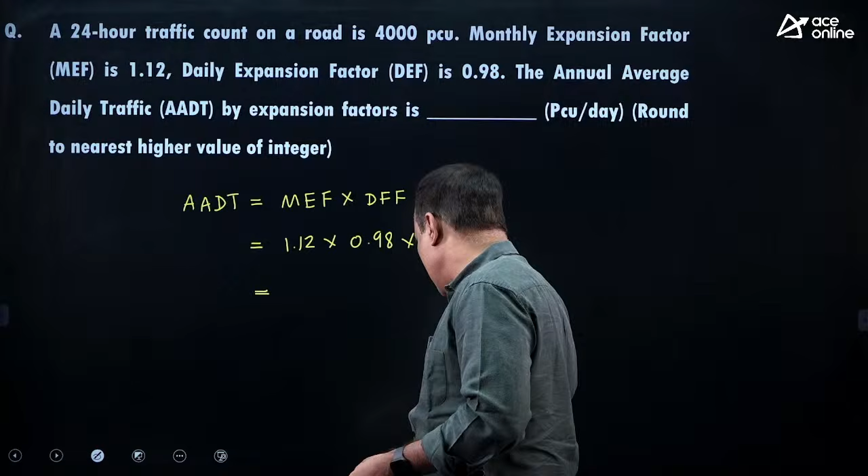Monthly expansion factor into daily expansion factor into the traffic on one particular day, 4000. Monthly expansion factor 1.12, daily expansion factor 0.98, into 4000. This gives the resultant answer as 4391 PCU per day. AADT is 4391 PCU per day.

If proper data is not available to calculate the AADT, you can calculate AADT just based upon one day's traffic by expansion factors like this. Any doubts? We will move to the next question.

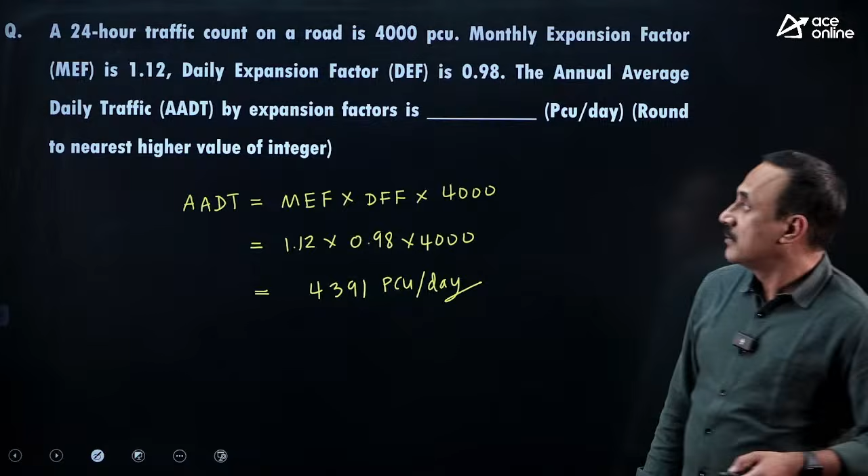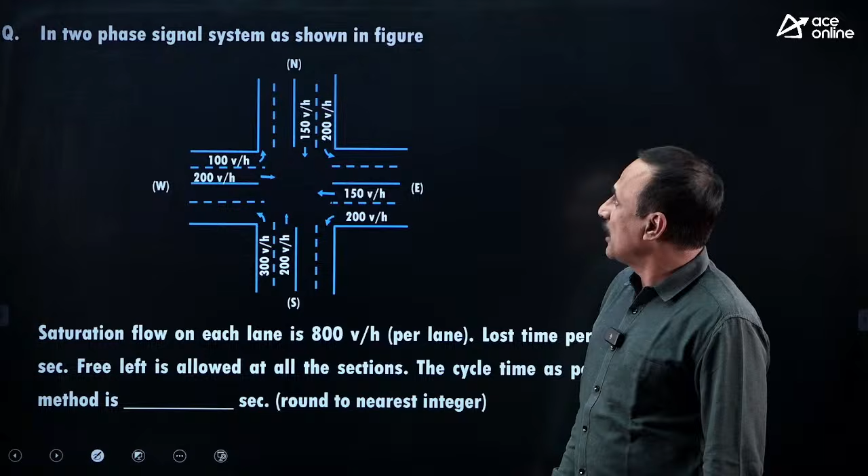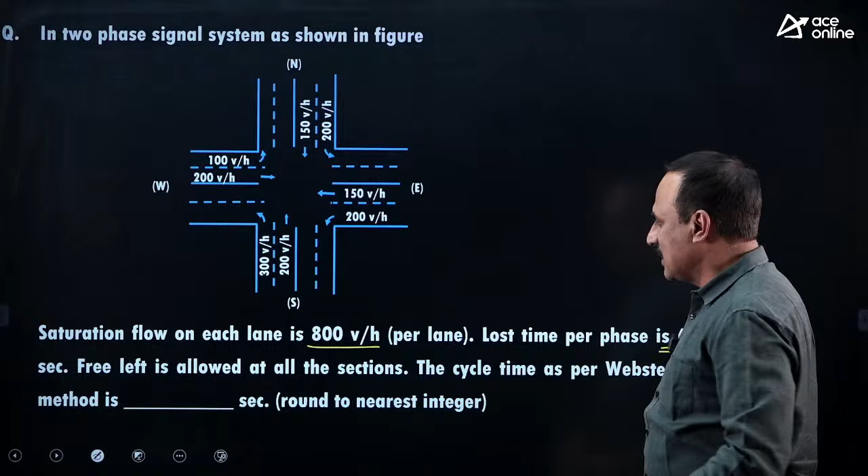Try this question. In a two-phase signal as shown in figure, slightly critical question. Saturation flow for each lane is 800 vehicles per hour, based upon Webster's method. Important question for us. Lost time per phase is 6 seconds. This is a two-phase signaling system.

Free left is allowed at all the sections. Free left means this vehicle is allowed to go freely without any signal. This is allowed to go to the left freely without signal. Free left is allowed, only you require a signal for straight going traffic.

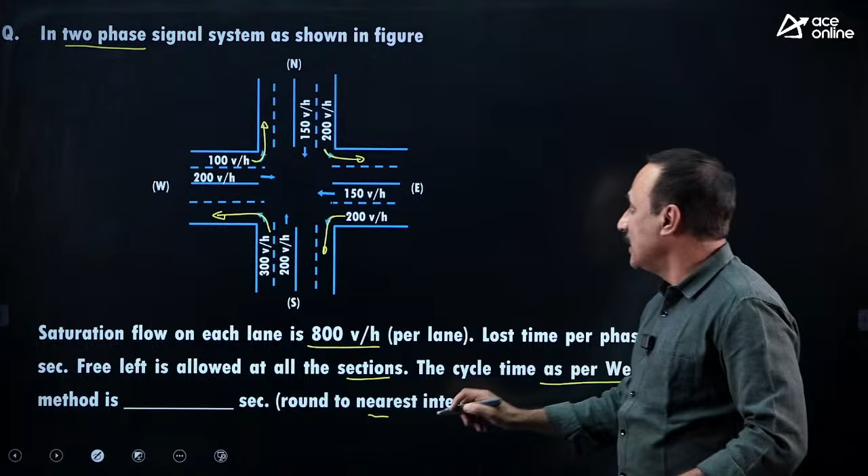They are asking you the cycle time as per Webster's method, rounded to nearest integer. Total lost time per cycle is given by, for one phase 6 seconds, and two phases are there. Total lost time per cycle is 6 into 2, 12 seconds. 12 seconds per cycle, capital L is lost time per cycle. Saturation flow for each lane is 800 vehicles per hour, any lane.

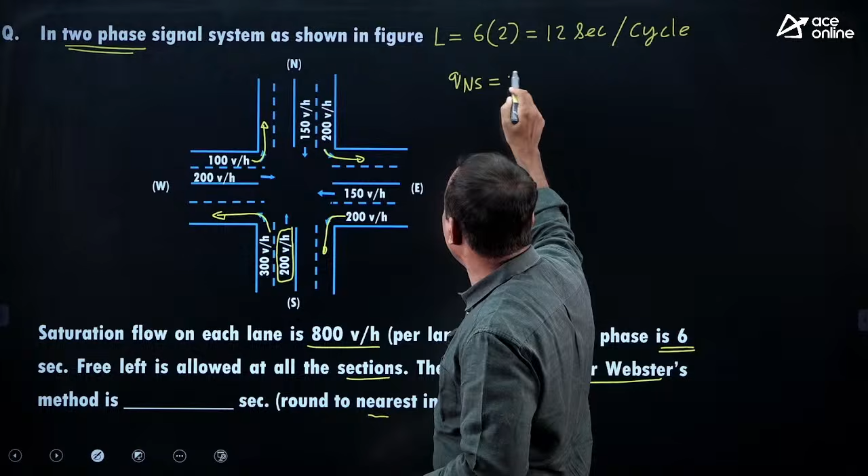Now coming to north-south, which is critical. Critical means this is 150 going to the south, 200 going to the north. North-south phase, 200 is critical. So Q north-south is 200, the higher of the two values. East-west critical is 200 here, 150 here. Q east-west is also 200 vehicles per hour, which is critical.

Now coming to the constant, y of north-south plus y of east-west. Two phases are there, right? North-south is 200 by saturation flow 800, and east-west also 200 by 800. Nothing but 400 by 800. 400 by 800 is half.

Cycle length or cycle time is 1.5L plus 5, divided by 1 minus y. This formula you need to know by heart, otherwise you can't solve the problem. Lost time is 12 seconds, so it's 1.5 into 12 plus 5, divided by 1 minus 1 by 2. This is 18 plus 5, 1 minus 1 by 2, the 2 will come onto the numerator. Give me the answer.

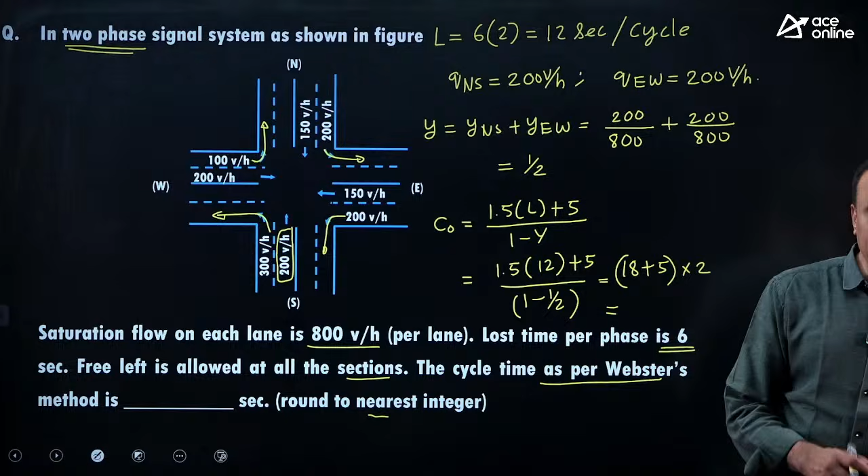Samir says 64 again, you see, at high speed we will commit mistakes, go by design speed. Samir says the cycle length is 64. In place of 46, it is 64 given. But Satish given correct answer, Murali given correct answer, Harsh, Sharath, Vasu have given correct answers. But Samir, in place of 46 seconds, you have given 64. That is a mistake. In survey, you come across mistakes. Try to avoid the mistakes. For that, go by design speed, don't go by express speeds in the exam hall.

Any doubts here? Vasu, correct.

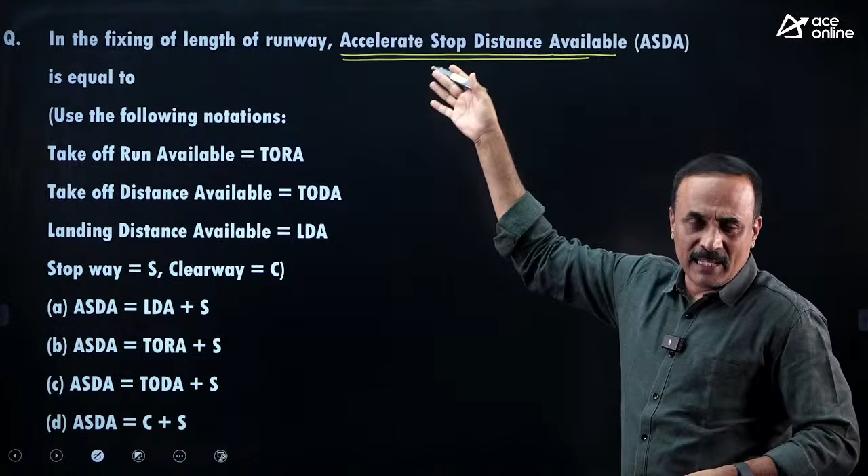Now we will go to the last question. In fixing the length of runway, accelerate stop distance available is equal to - while fixing length of available runway, acceleration and stop distance is given by, go by process of elimination: take-off run available plus stopway. This is a memory-oriented 1 mark multiple choice question. Acceleration stop distance is equal to take-off run available plus stopway or safeway. So the answer is option B.

We will stop here. We have taken a few critical areas where questions are coming very regularly in the GATE exam, especially focusing on multiple select and numerical answer questions. So you have to be very careful. My suggestion is go through the previous year questions and practice similar questions, so that you will get 60 to 70% of marks with that.

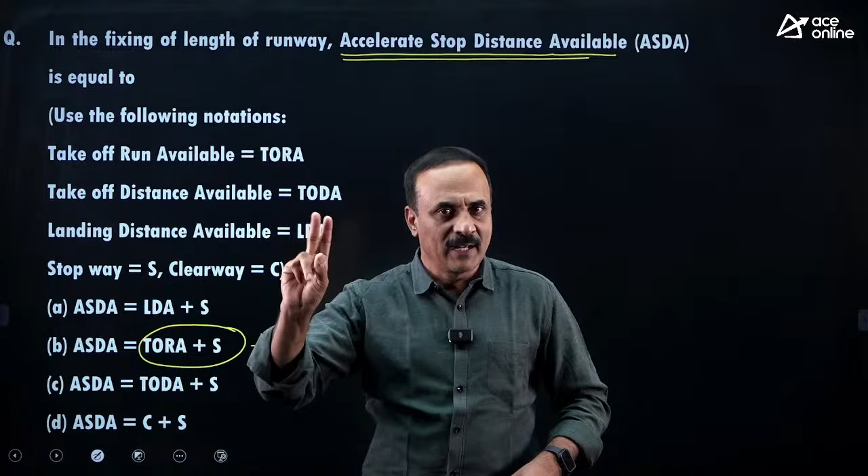To get more than that, you need to tap the untapped areas and then prepare rigorously. My suggestion is try to avoid mistakes, try to avoid missing the units. For that, you need to concentrate upon units. They may ask you some units, you may get some other units while solving, so try to substitute the appropriately correct unit, and learn by heart the formulae, empirical formulae mainly, and specifications in transportation.

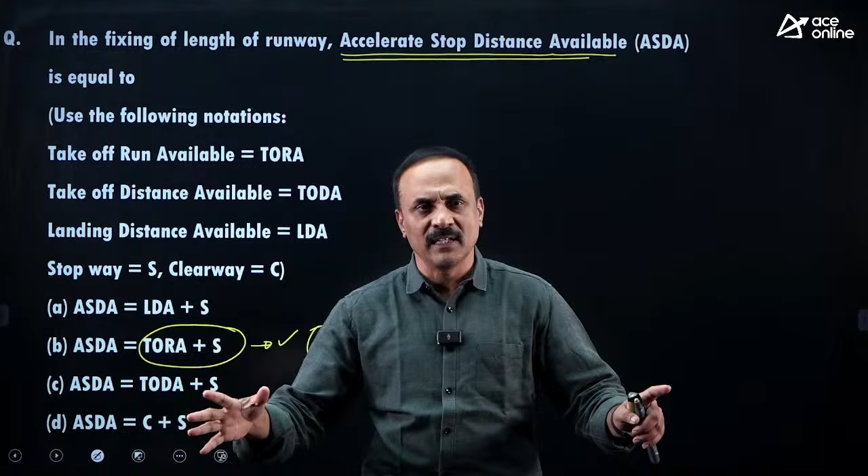Hardly you may get one theory question out of all from transportation. Even though it is a theory subject, you will get hardly one question, maybe 1 or 2 marks question, maximum 1 mark question will come. So with concentration and dedication, with design speed, you go ahead to get the maximum committed marks.